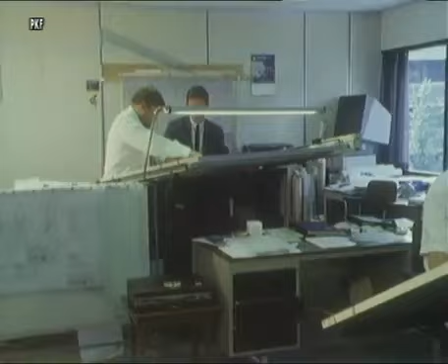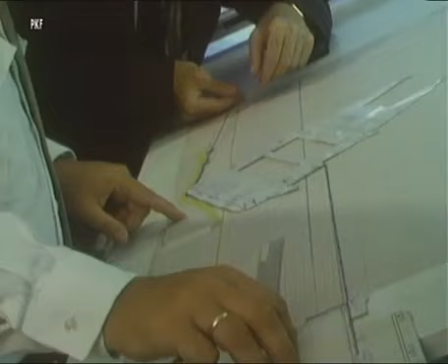Even before the salvage contract has been signed, SMIT engineers at Rotterdam are working out a salvage plan. No other salvage company can mobilize the necessary equipment in such a short time as SMIT does, in close cooperation with the URS Towage and Salvage Union of Antwerp. The Herald of Free Enterprise weighs 7,951 tons, has an overall length of 131 meters and a beam of over 22 meters.

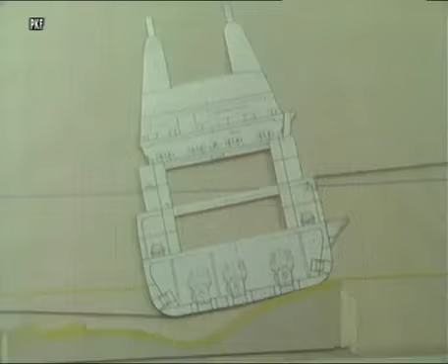With knowledge of these and other particulars, a scale model of the ship is made. This is vital so that it can be established how the capsized wreckage can be uprighted successfully. The lifting power of this operation will be provided by 3 shear legs and 2 pull barges, with a total lifting and pulling capacity of over 10,000 tons. About half the wreckage is visible above sea level. At low tide, the water depth at this particular spot is over 11 meters. The ship's hull plating appears to be intact.

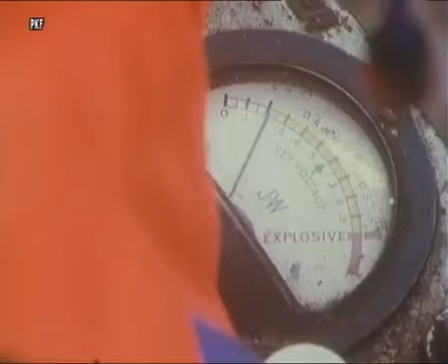With dense, reeking gases escaping from the ship's hold, it is not known exactly what cargo the vehicles have been carrying. Chemical experts enter the wreckage to determine the composition of the fumes. They find no immediate hazardous circumstances. It is difficult to find a way inside the capsized ship in which stairways are now in a horizontal position. A part of the cargo of the upturned trailers is floating in the ship's hold.

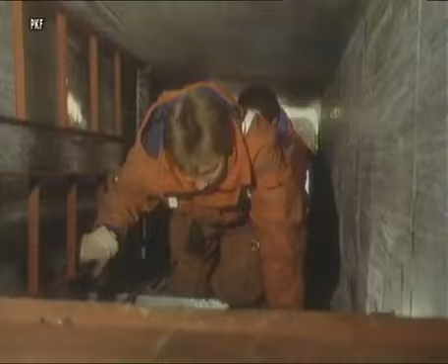Water samples are taken in many parts of the ship. They will be examined for toxicity and radioactivity. Silent evidence of a tragedy is everywhere. Within hours of the tragedy, the international press is on the scene in great force to report the disaster. Senior salvage superintendent Hans Vollenkamp explains the method chosen by SMIT to upright the vessel to journalists and authorities at a press conference.

So you see there's 32 points here we designed during the weekend, our technical department in Rotterdam. At this moment we are that far that the first strong points have arrived this morning. So we'll start this afternoon at least with all the necessary preparations to weld on those strong points. So that's the connection as far as the ship is concerned. The welders have arrived, the welding equipment has arrived. We are loading it now on our salvage vessels here in Zeebrugge, and they intend to go out within 1 or 2 hours.

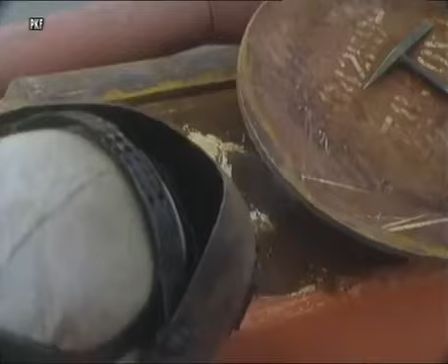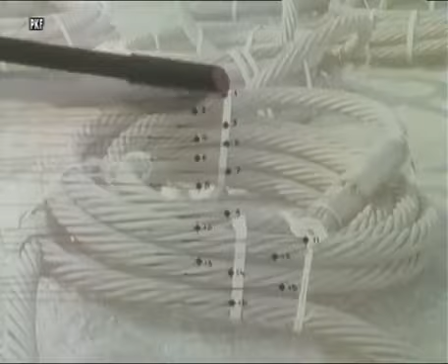Providing the weather conditions remain good, men will work day and night around the clock on the casualty. The first thing to do is to weld 32 strong points to which wire slings for the pull barges can be attached. Because of the seabed conditions, the pull barges Taki 31 and 32 will be secured by means of 16 piles driven down into the seabed. These piles are in fact steel pipes which are used for transport of liquid gas. They are 142 centimeters in diameter and have a length of 30 meters.

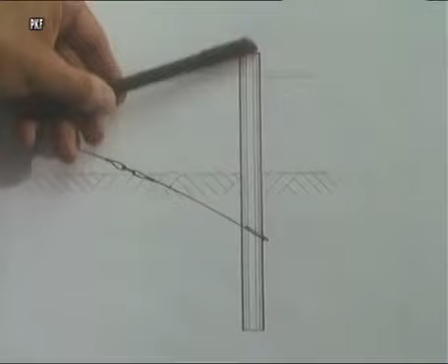Before pile driving can begin, wire slings have to be attached to the 16 piles. The piles will be driven down with the wire sling into the seabed at a depth of approximately 17 meters. In the history of salvage, this is only the second time that piles have been used for such a purpose. The floating shear legs Norma has been designated for this job.

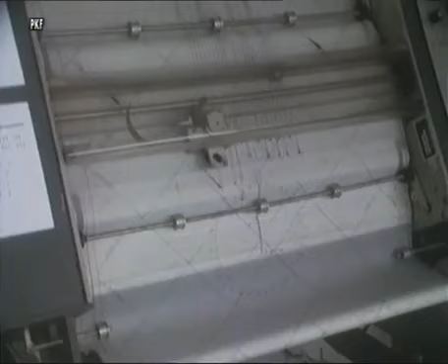On board ship, the exact location of each pile is carefully checked with accurate positioning equipment. This is of the utmost importance, as there must be a proper distribution of the enormous power needed to upright the Herald of Free Enterprise. Each pile must resist a force of 200 tons. Throughout the salvage operation, samples of water are taken. It appears that there is no immediate danger.

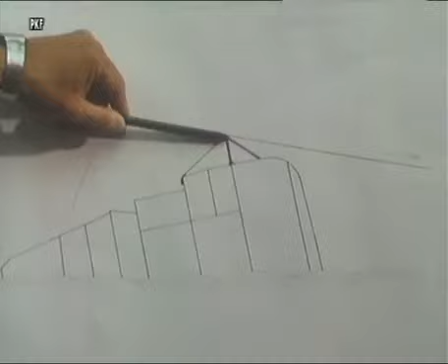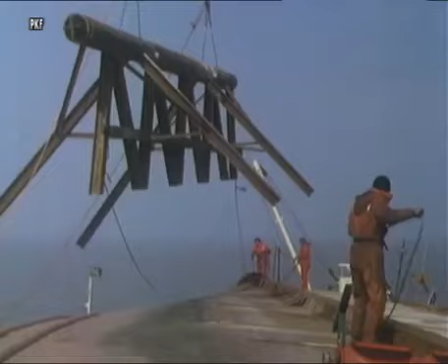With sudden drops in temperature due to icing, working on the Herald becomes a risky business. To divide the forces as much as possible, we will install cantilevers in way of the main deck on the upper hull side. Although the sea remains calm and there is little wind, it is difficult to position the violently swinging 12.5 meters long cantilevers.

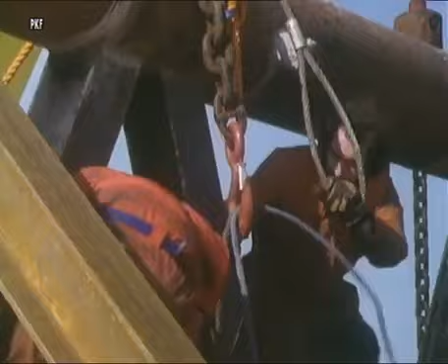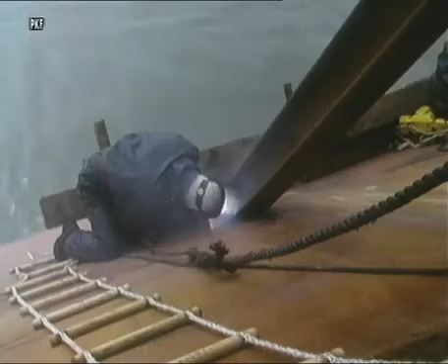Ten welders work day and night to attach these cantilevers. Exhaust pipes and scupper valves in the hull plating have to be sealed with concrete and wooden plugs, as they will be below the waterline once the wreckage is upright again.

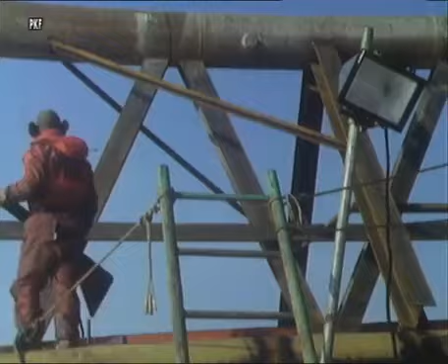And then, due to bad weather, the welding of cantilevers has to be halted. But on March 26th, 20 days after the disaster, this work is completed. Dense fog sets in. However, welding and other activities continue.

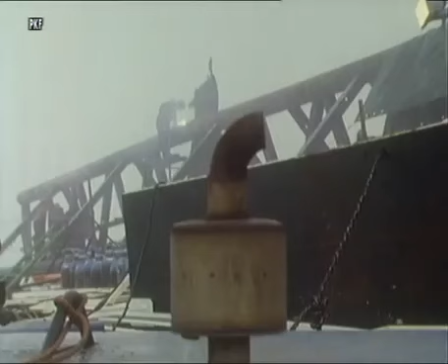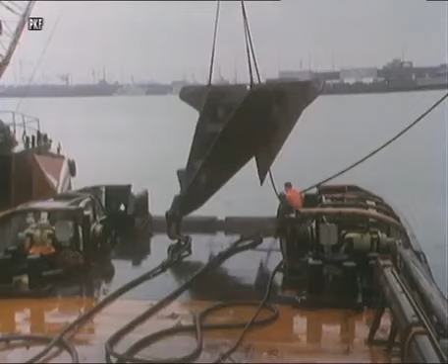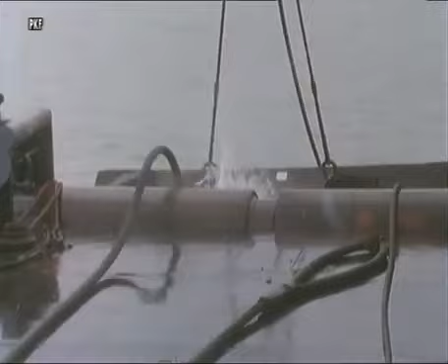In the meantime, 10 reaction anchors, each weighing 15 tons, have arrived from SMIT warehouses in Rotterdam. The salvage vessel, SMIT Orca, will position the anchors, which will prevent the casualty from moving sideways. Wires for reaction anchors will be installed around and underneath the hull of the vessel.

In bad visibility, the SMIT Orca transports the reaction anchors one by one to the site, carrying them below the stern. Without radar, such a task would be impossible. Due to bad weather, the positioning of the anchors takes 5 days.

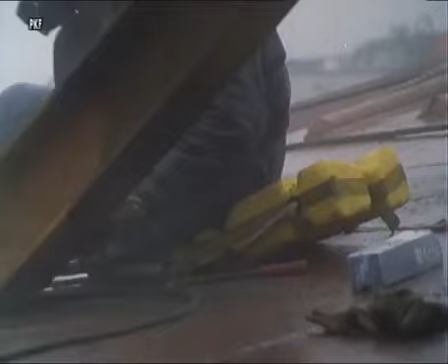In the meantime, the welding continues. In the end, the welding and construction required a total of 3,500 man-hours. Sometimes strong currents occur around the wreckage created by the wind and tide. This hampers the salvage work, especially the diving operations. Furthermore, the ship's position is exposed to the scouring effect of sand.

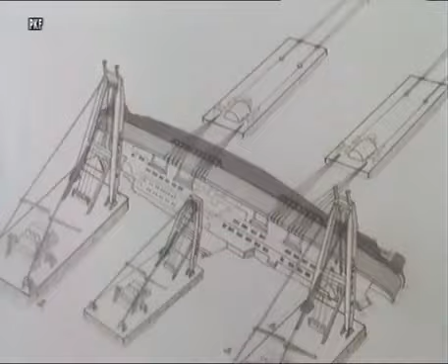On April the 4th, the 2 pull barges arrive at the site. The pull wires already connected to the vessel in the way over the E-deck will, via the cantilevers, be connected to the 2 pull barges, Takheave 31 and Takheave 32. It takes till the early evening to connect pull wires from the Herald to the barges. These steel wire ropes have a diameter of over 9 centimeters.

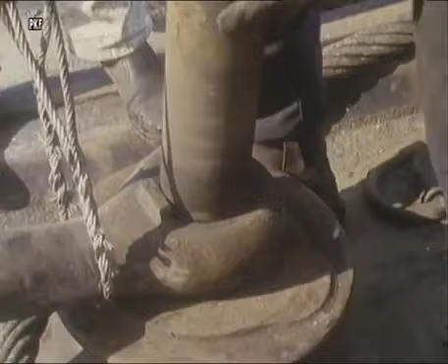A total length of about 6 kilometers of steel wire rope is finally used to salvage the ship and stabilize her in an upright position. The 16 piles are now connected to the pull barges with the wire ropes, each rope measuring 140 meters. Their diameter is over 9 centimeters. A shackle like this weighs over 230 kilos.

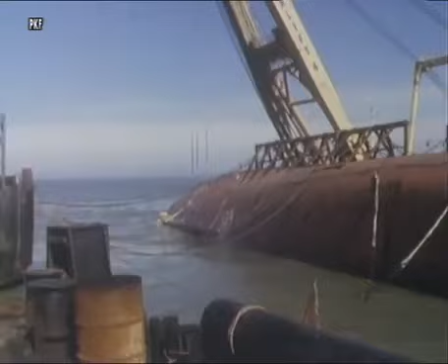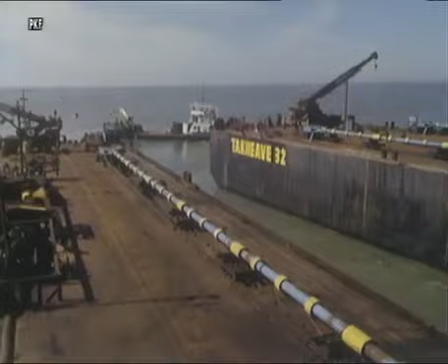Finally, the day comes when all wires are attached and the uprighting of the Herald can commence. At wind force 2 to 3, the sea is calm, but the weather is going to deteriorate shortly according to the forecast. It has been decided to start the uprighting operations in the early morning of April the 7th.

The operation is controlled from the commander's cabin on board the pull barge Takheave 32. In close proximity to the wreckage, both barges and 3 shear legs are in position to pull and to hoist simultaneously.

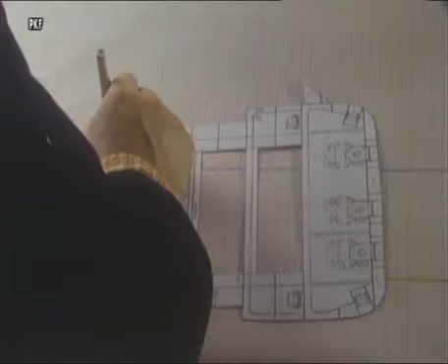Okay. A scale model of the wreckage is used to register the progress of uprighting.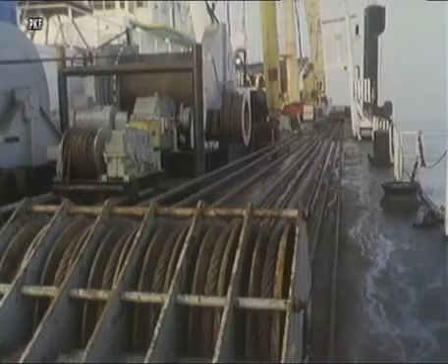Deck tackles on Taklift 4 and 6 increase the lifting capacity of both shear legs up to 4,000 tons. At 8:20, the uprighting operation begins. The weather conditions are still favorable. The wind is force 2 to 3.

Gradually, the drag force by the pull barges is increased to 2,320 tons during the operation.

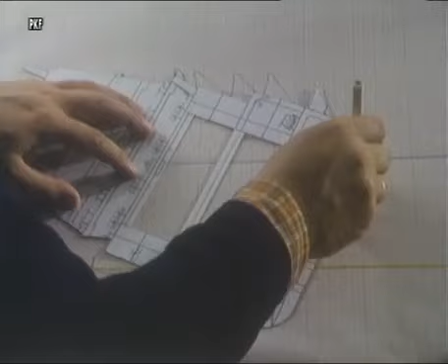Slowly, but surely, the ship rises into her normal position.

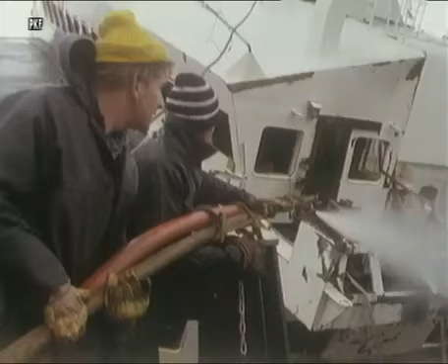Mud and sand are washed away in order to increase flotation of the wreck. After 10 hours, the uprighting operation reaches the final stage. At 5 to 6 in the evening, the list, which is continuously monitored on board the ship, is now reduced to some 5 degrees.

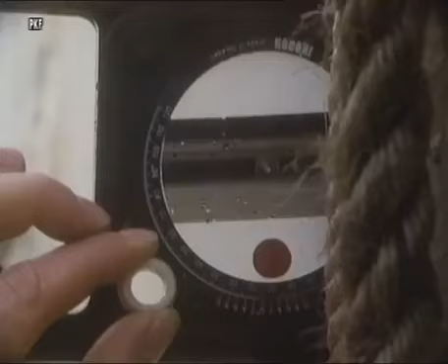As soon as the Herald is in an almost vertical position, again the salvage is temporarily held up, this time to enable authorities to inspect the interior of the ship. In the cafeteria, many passengers lost their lives. Recovering the victims takes until midnight and continues during the following days, while shear legs and pull barges keep the wreckage in position.

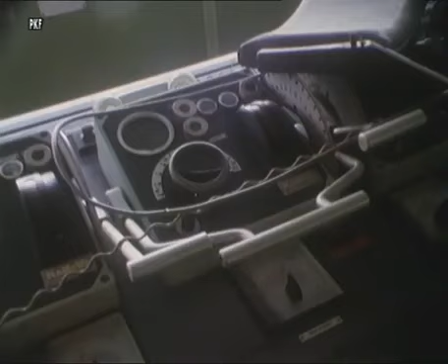From the chaos on board ship, it can now be seen how quickly the tragedy took place. Lifeboats and rafts could not be lowered in time. As the recovery of the bodies was of primary concern, the draining of the wreckage and making it watertight is delayed for days.

And then suddenly, there are high winds reaching gale force in the night of the 12th and 13th of April. Wind force 9. 6-meter high waves lash the wreckage. In the night, anchor and mooring wires break. Shear legs, Taklift 4 and Taklift 6 and one of the pull barges break free from the wreckage.

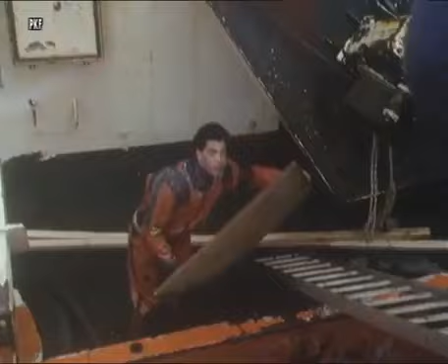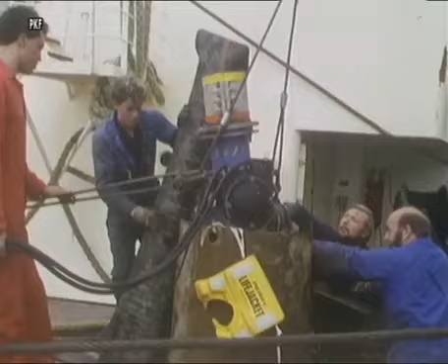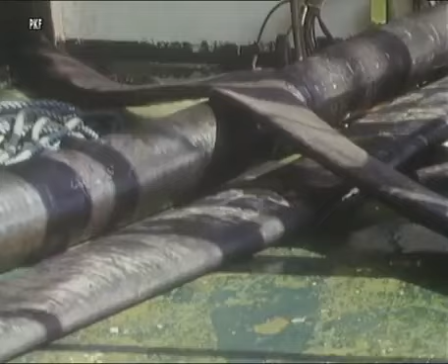With wooden boards, windows and doors which have been smashed during the gales first have to be patched. At the same time, pumps are installed and positioned all over the ship. As the pumps go into operation, 5,000 tons of water per hour is pumped out of the wreckage.

During the operation, the shear legs assist in lifting the ship, and as the stability is critical, also keep her in a vertical position. Each Taklift is able to develop a lifting capacity of 1,200 tons.

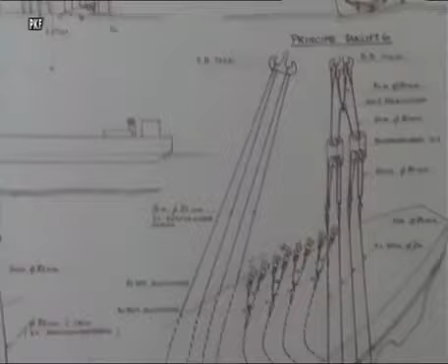The lifting wire slings are now attached to the vessel, leading from port to starboard and the others from starboard to port, thus equalizing the forces on both sides. In the lower compartments of the ship, the water level gradually subsides.

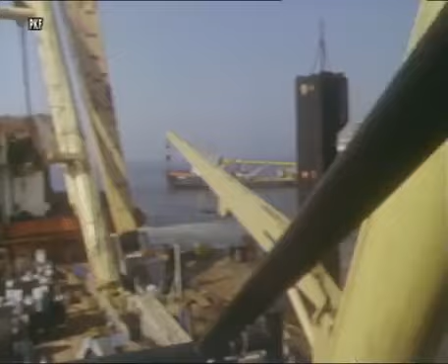At 10:30 in the morning of April the 27th, the Herald of Free Enterprise is afloat again. Tugboats can now tow the ship into Zeebrugge Harbour, accompanied by both shear legs, which keep the wreckage stable and upright. In the meantime, pumping out of water continues.